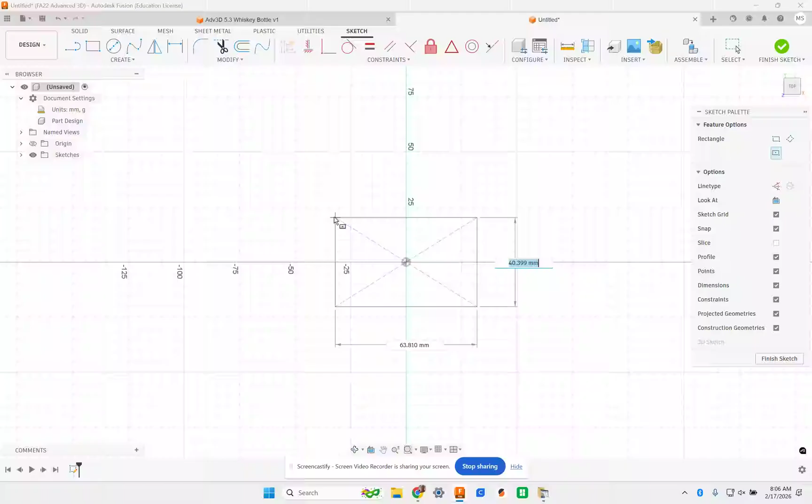To begin with, we're going to start with a sketch of a rectangle, and we're going to use the center point rectangle. Drop it in the middle. Our dimensions here are going to run 63 deep and 76 wide. Before we click out, we're actually going to choose the fillet tool. We're going to drop a fillet in these bottom edges.

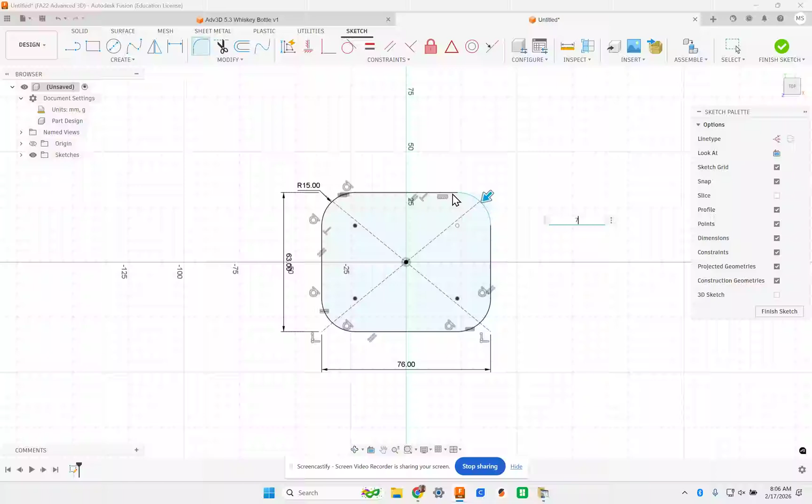I need to click both sides of each of the right angles here in order to drop a fillet on them. Once I have them all selected, I'm going to drop in a 7mm fillet. I can hit finish sketch, and that is the bottom level of our bottle.

Now, if I go back to the bottle, you can notice it's got basically 4 different levels. There's a rectangle on the bottom, a rectangle at the midpoint, a circle, and then another circle. So we're going to have to do those. And to do it, we're going to offset a plane. So I'm going to construct, notice I've clicked on my object, I'm going to construct an offset plane.

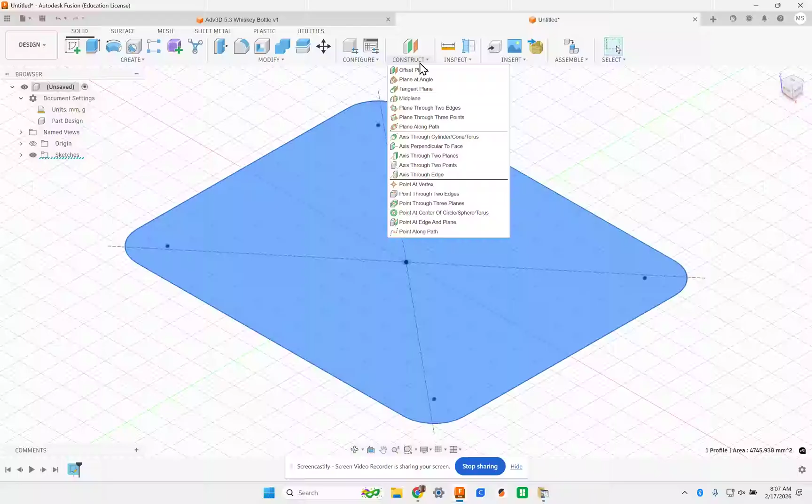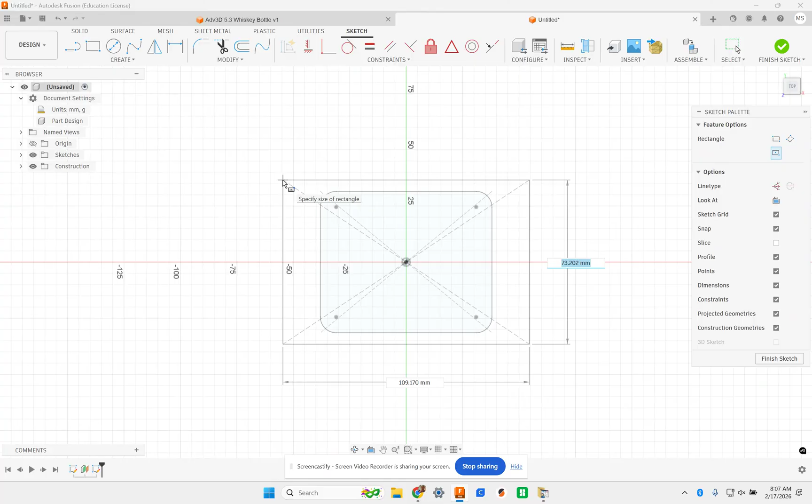This first offset is going to move up 114 millimeters. When I hit enter, I have now a plane that's 114 millimeters offset from the bottom. I'm going to click on that plane, and we're going to create another sketch here. It's going to be a rectangle with a center point. Start in the center. I'm going to drag it out. This rectangle has a depth of 76 millimeters and a width of 95.

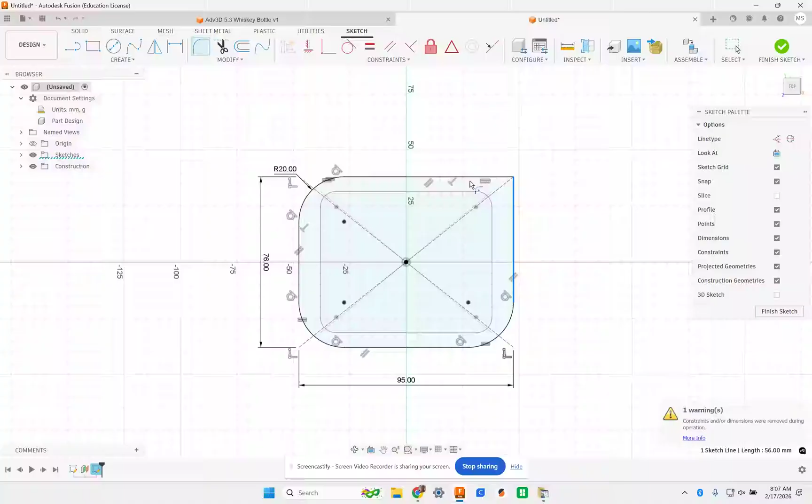Just like the previous one, I'm going to want to drop in some fillets. So I'll grab the fillet tool, grab a corner, or I should say grab a side, grab a side, grab a side, and grab a side. Now this fillet's going to run at 12 millimeters. So I just put a 12mm fillet in there. You can see that note right here, 12. I'm going to finish that sketch, and I've got 2 of the 4 parts I need.

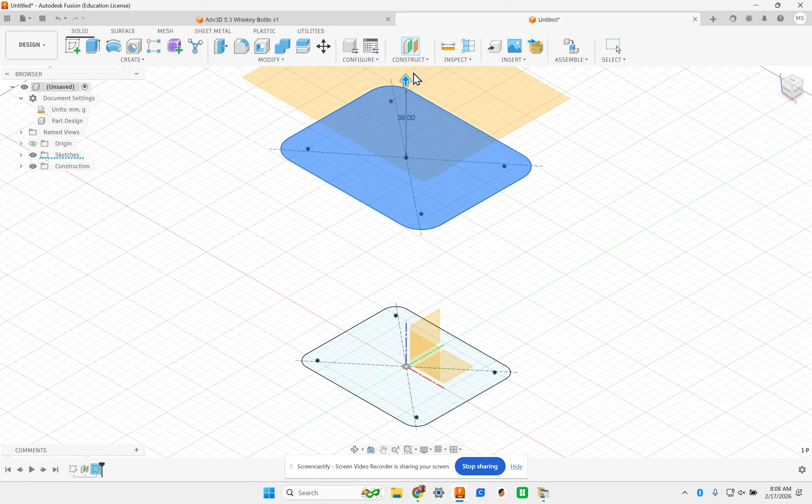Next, I'm going to click on the object I just created, that kind of middle rectangle. And I have to construct another offset plane that's going to be above this, and we're going to run this one up 38 millimeters. I'm going to click on that plane. I'm going to create a new sketch of a center circle. This is going to be the start of the neck of the bottle.

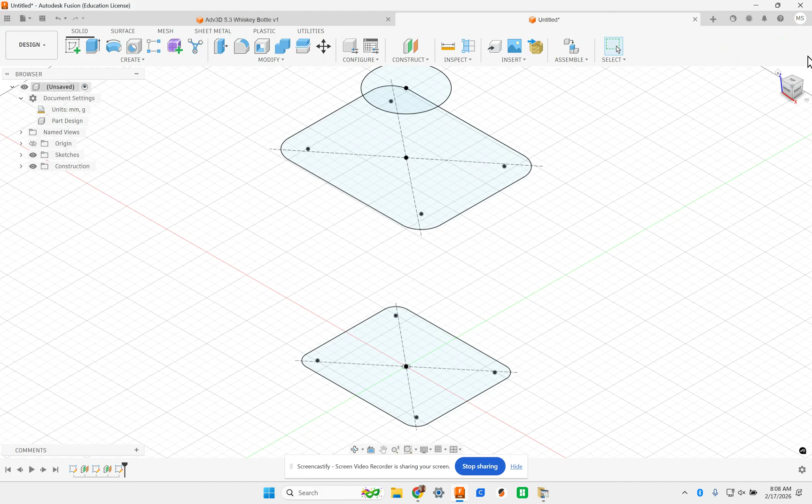We're going to run this out with a 40mm dimension and click. So there's my 40mm circle. It's looking pretty good. I can go ahead and home this now, and I need to do one more offset. So I'm clicking on the 40mm, clicking offset plane. We're going to run this up 89 millimeters. I'm going to drop into home view so I can find it.

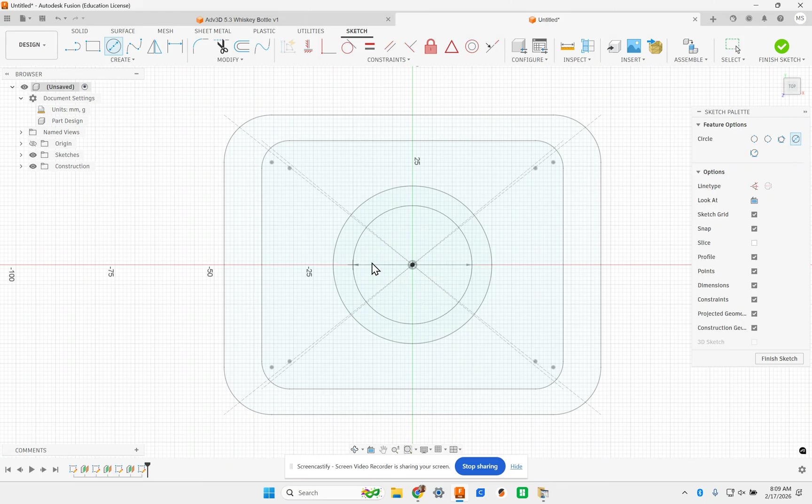And I'm going to click on that plane, choose create sketch, and we're going to drop in another center point circle. Click in the center, drag out, and this one we're going to run at 30 millimeters. I'm going to move this line. 30 is good, but I don't like where it's positioned, so I'm going to drag it, get it out of the way. You'll see why I did that in just a bit.

Finish the sketch, go ahead and click on home, and you can see we got kind of the general gist of what our bottle is going to look like. Rectangle, rectangle, circle, circle. Now, if I went right into the loft tool, because we are going to loft this, which is under create, and then loft.

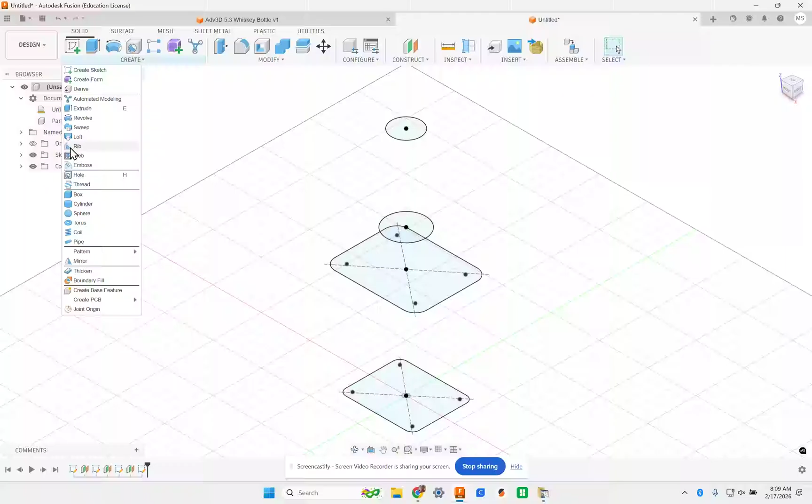If I went ahead and clicked on my objects to loft, you will see it's going to do some weird stuff. That looks more like an I Dream of Jeannie kind of bottle compared to the whiskey bottle that we're trying to make. So here's what we're trying to make, and you can see here we've got some issues. So we're going to actually delete that loft.

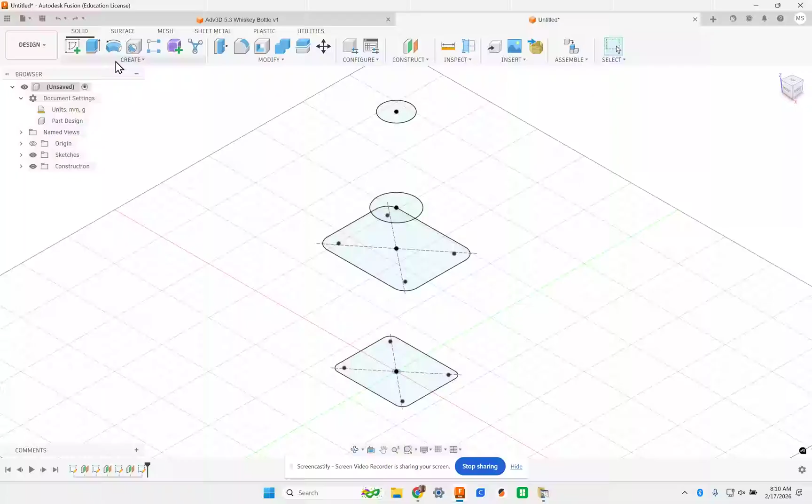I take it back. I'm going to undo that loft. And now I need to put a point on the side that we can use as kind of a guide point to follow while we're building out this shape. So to do that, I'm going to click on the bottom plane here.

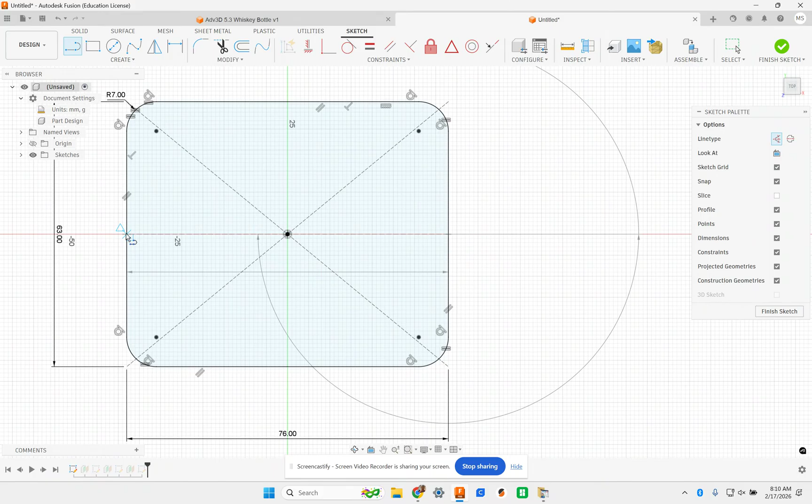Actually, I can double click on this object, and I'm going to hit letter L for line, or you can go up here and choose the line tool right there. I'm going to make this a construction because I don't want it to actually show up in the build. I'm going to click on one side where the triangle starts and bring it to the other side, drop it off, hit finish sketch. So now I've got a line going through the bottom.

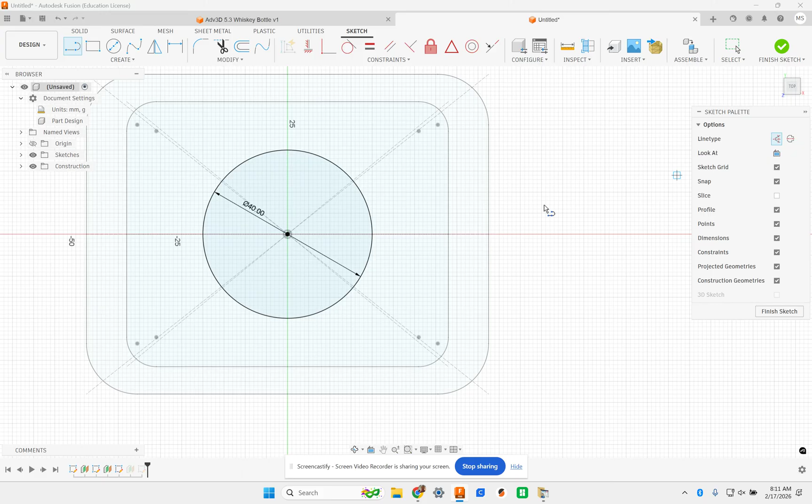Got to go to the next shape. I'm going to make another line, construction line, click at the triangle, drag it straight across, click at the triangle, we're good. Go to the third shape. It's going to be this circle, make a line, make it a construction line. I can't go edge to edge. It's not going to find the actual edge, so I can actually start in the middle, bring it out until it catches the edge, click, and now I've got a construction line going out.

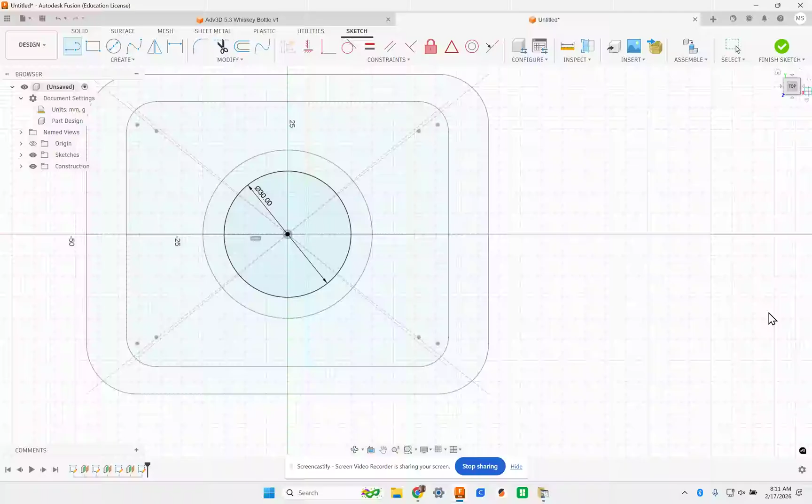And I'll do my final shape here. I'm going to go into the line tool, choose construction line, start in the middle, drag it out, click, and finish the sketch. So as I'm all done, if I zoom in here, I should see I've got a point there, got a point right there, got a point right there, and I've got a point right there.

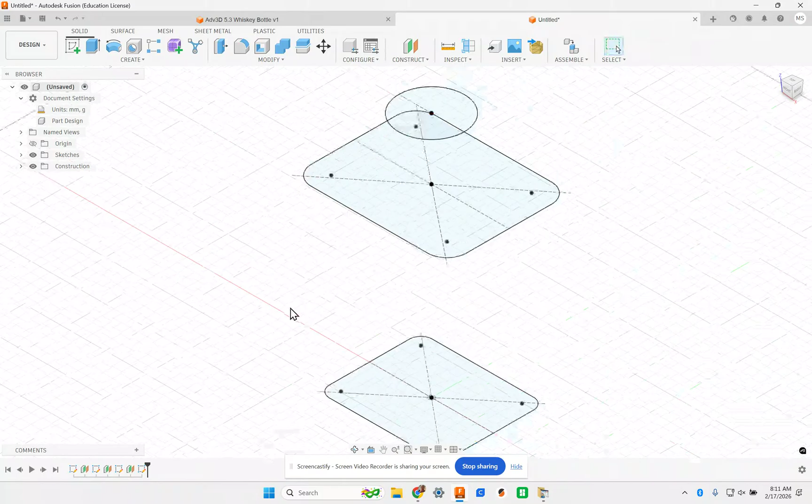Awesome. So those 4 points I'm going to join together using a spline tool, and that will help us make our bottle look more like a bottle and less like I Dream of Jeannie bottle. So that's the next step. So I'm going to click on Create. I'm going to actually choose the ZX plane, which is this front face. I'm going to go to the spline tool, Fit Point Spline.

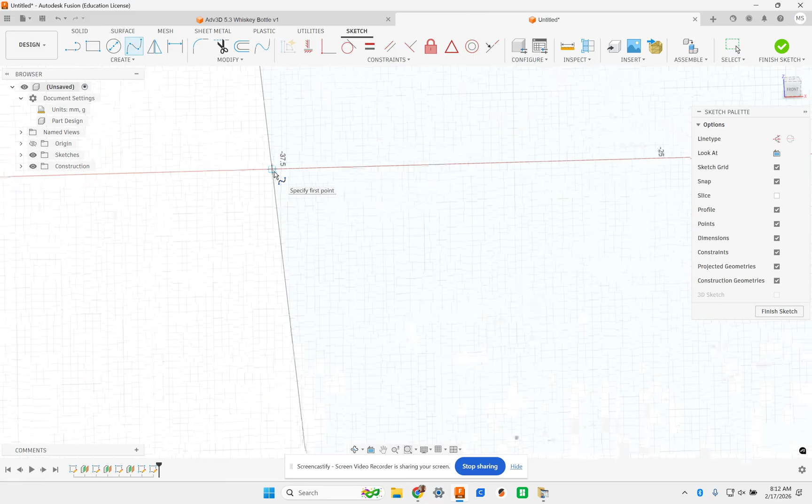I'm going to zoom in a little bit so I can find it. And I actually want to grab this point right here. It'll snap to it. It takes a little bit of playing around to get it to snap, but it will snap to that line. And I'm going to drag it up, zoom out a bit, drag it up, zoom in a bit. I can adjust my view, zoom in, click right there on that little buddy. Zoom in, we want to find this point right here, click, done.

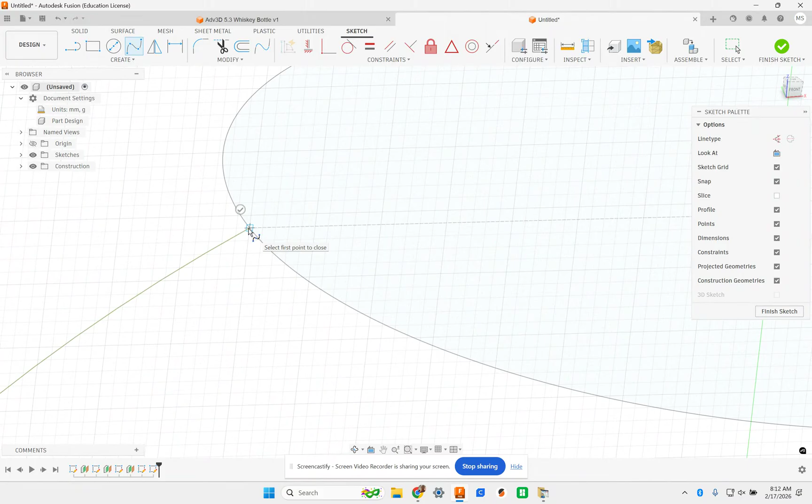Okay, so now I'm good with my spline, and I'm going to go switch over to the line tool. See how it's got the little squiggle for spline? I'm going to actually hit the L for line tool. Now I'm going to click at this final point that I left because we want the neck of the bottle to be more straight. Zoom in, click, and we are good on that. So I'm going to hit checkbox.

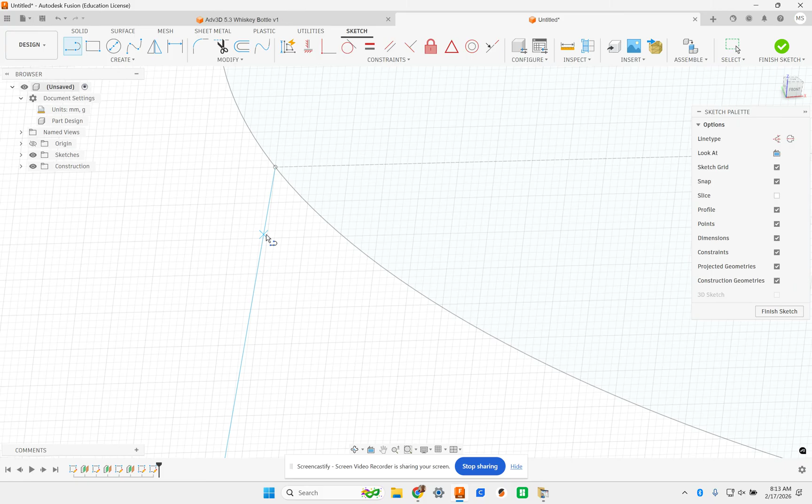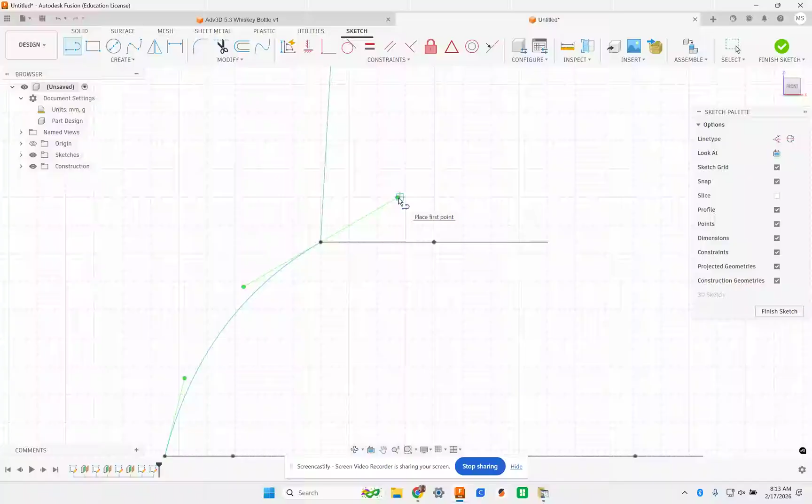So I'm still within the sketch palette, and this is key. Earlier when I was doing the demo on this, I came out of the sketch palette and I could not get back to the right spot. So I'm still within the sketch palette. I'm going to go to the front, and we want to revolve this. Actually, we want to adjust this a little bit. I'm going to hit escape because you can see I've got the line tool turned on. I'm just going to hit escape one time, so now I can do some adjustments with this.

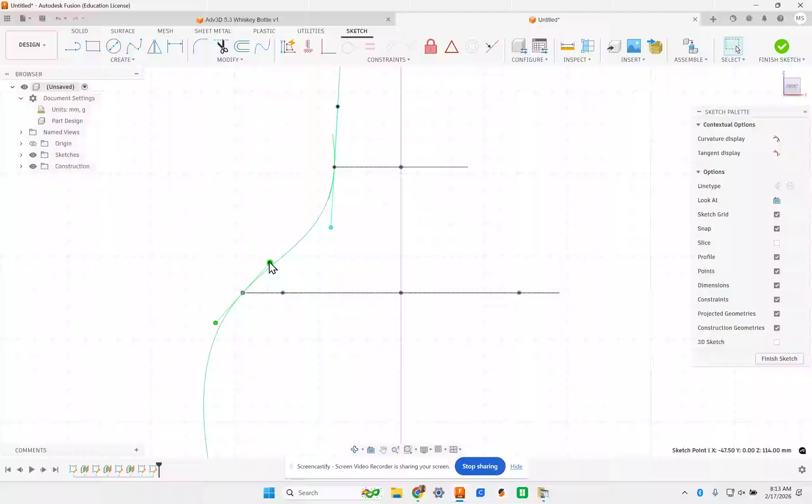And this is very important too. I have to drag this piece so that it lines up with this vertical bottle neck. Otherwise, when we go to do the loft feature, it's not going to loft correctly. I can do another adjustment down here if I need to. I can adjust this little doohickey. I'll bring it like this. Okay, I'm going to swing out here by hitting front, take a look at my bottle, see if it looks how I kind of want it to look. That looks pretty good.

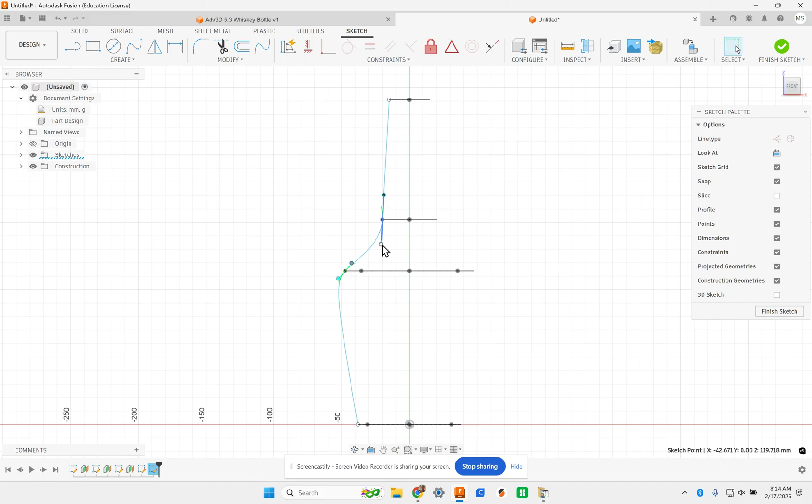All right, now I want to mirror this line, and I want to go to the opposite side. I want to redraw it. So to do that, I'm still in the sketch palette, I have not hit finish sketch yet. I'm good to go with my shapes. Again, if you want to tweak your shapes, you can. Just verify that this top dot here lines up with this vertical line. Otherwise, you're going to have problems down the way.

I can go into the create menu. I'm going to choose mirror. This is the sketch mirror. Oh, I take it back. I got one step ahead of myself. I actually need to hit the line tool first. I need to make a center line so I can mirror it.

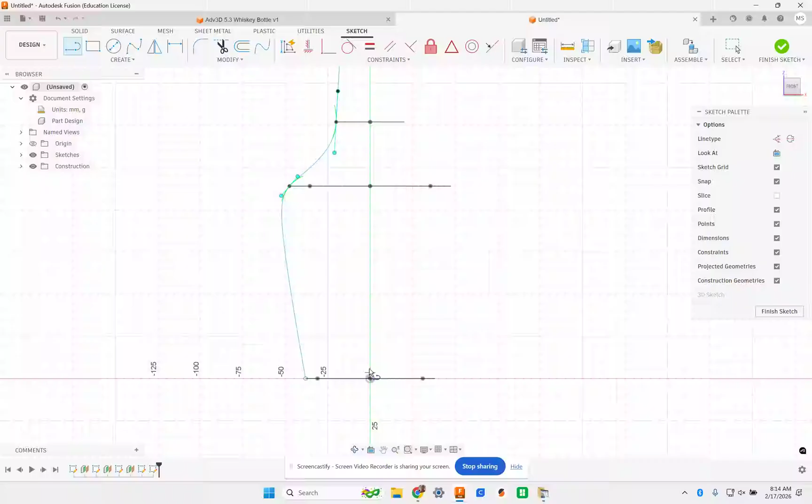So now that I've got the line tool selected, I'm going to choose construction because we're not actually making a real line. I'm going to choose the bottom, go on up, choose the top. And now that I've got the two things I need to mirror, the line I'm doing, as well as the center line, now I can go into the mirror.

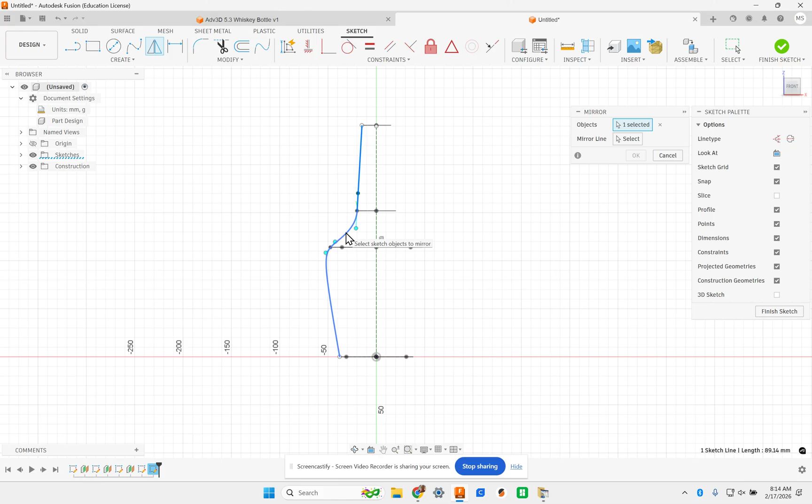I'm going to select my two lines here, hold down the shift key. So those are the two objects I'm mirroring. Then I have to choose the line to use to mirror it. That's this line right here. Got those done. I'm going to hit OK. That looks pretty good. I'm going to hit Finish Sketch. Now I've got a pretty good looking kind of outline of what the edges of my bottle should look like.

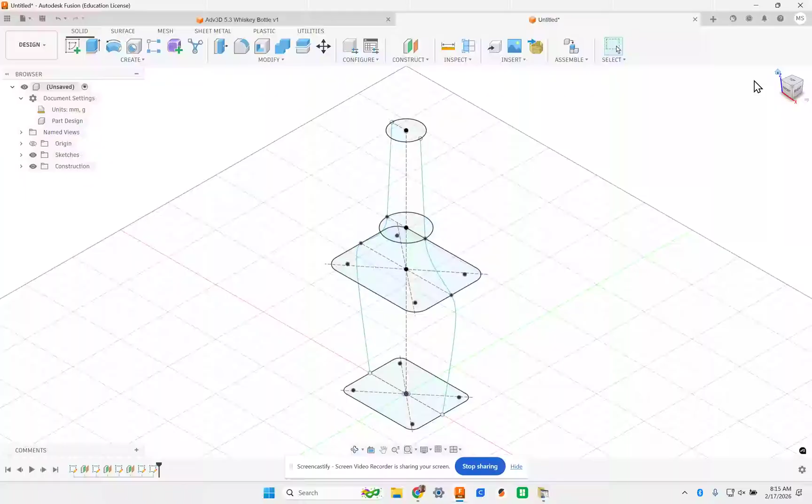Next step, I'm going to go back into that loft tool because obviously we want to connect the different planes. So I'm going to go here to Create, choose Loft. Now I'm going to pick this bottom guy, and then the middle, and then the circle, and then the circle. And you're saying to yourself, wait a minute, it went to all the weird shapes again.

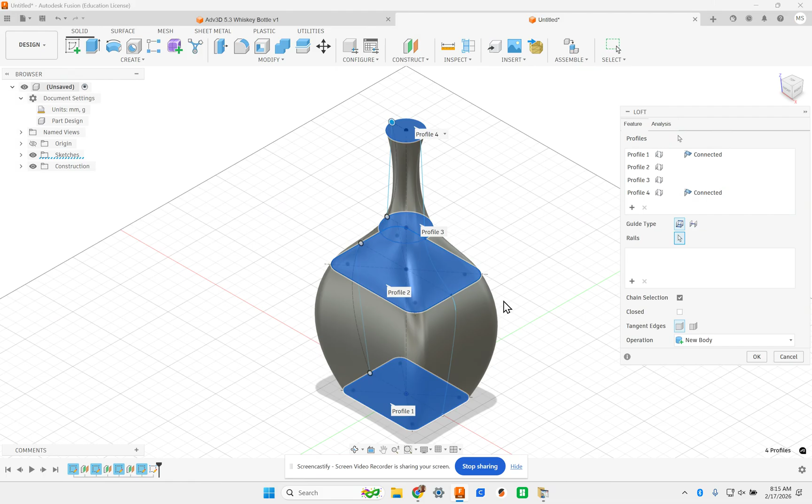Well, we can actually use rails. That's what we were building with that spline tool. We were building rails. Now we're going to choose rails, and we're going to click on this spline and also this spline. Ooh, that looks pretty good. I'm going to hit OK, and you can see that's pretty much 89, 90, 95% of the way there.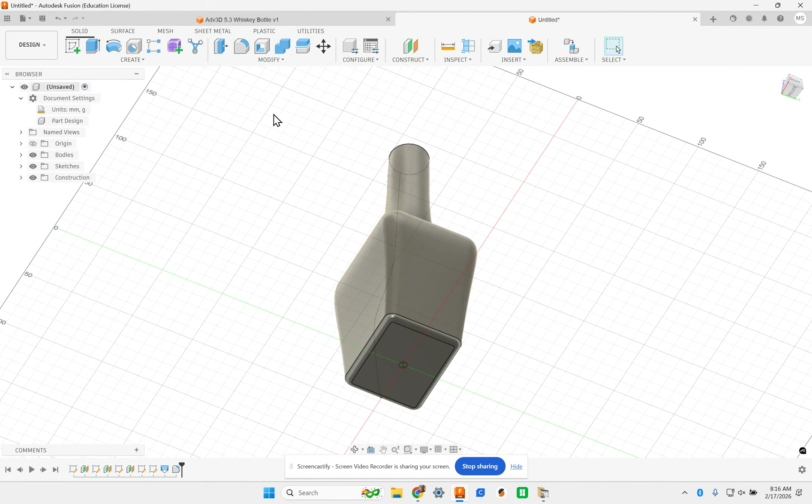We want to make our bottle look a little nicer as a bottle, so we are going to add a fillet to the bottom. So I'll click on the bottom, fillet tool. Let's go with about a 5mm fillet on that, 5 mils. At the top here, I'm going to add some threading so we can conceivably put a screw top on top. So I'm going to click on this top edge.

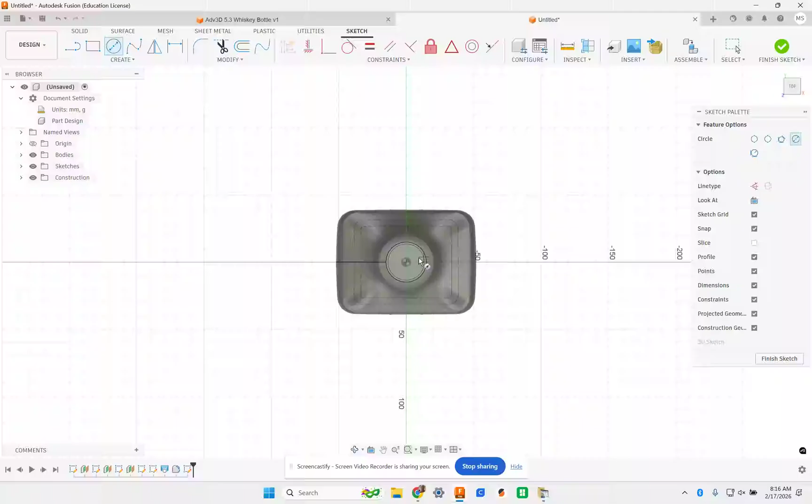We are going to go into our create menu, and we're making a new sketch of a circle. We're going to click here and drag this out. Let's go 27 and finish the sketch. Now we're going to choose that circle we just made. We're going to extrude it up. Let's go 12mm. And we've got kind of the beginning of a place that we can put a screw cap on.

The next feature, this is where we're going to make it hollow. I've had students in the past just print this as is. It's not hollow, and it will take forever to print. So we're going to click on this upper surface here, the thing we just added. And we're going to go here and choose the shell feature. So shell feature will make everything inside hollowed out. We're going to run this down to a 3mm shell.

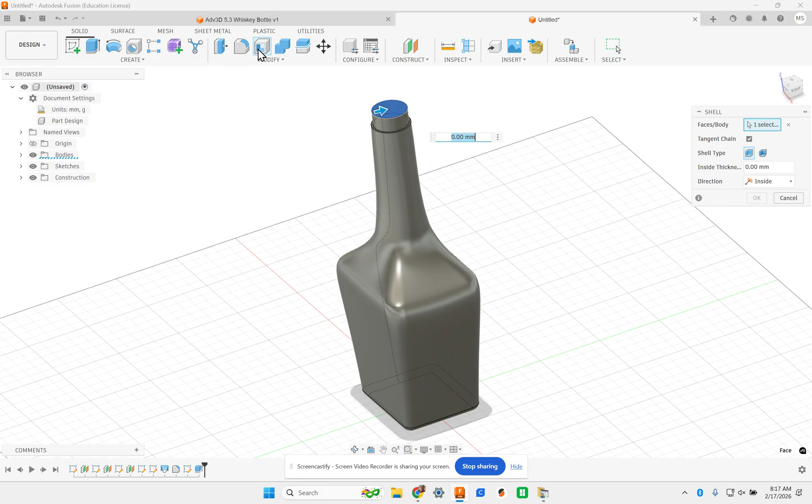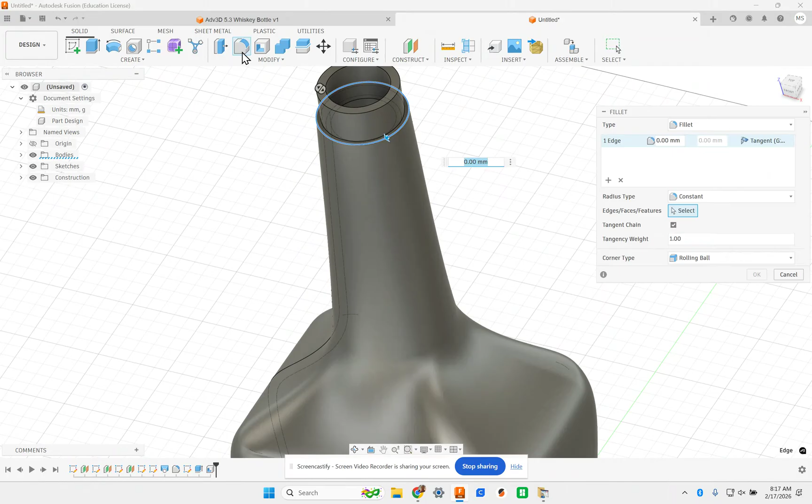I hit 3. It's going to then basically hollow the entire thing out with 3mm of thickness around the whole thing. And that's exactly what we want. So now we have a hollowed out bottle. We can zoom in and make this edge here a little smoother so we're not cutting our lip on it. We're going to hit fillet, 2 mils just to smooth that out.

And last but not least, we're going to add some threading to our bottle. So we'll click on this surface here. And under create, we can go down to thread. And now some people, when they do threading, they forget to check this modeled box. So you can see the word modeled here. We've got to check modeled, or else it's not going to actually make the thread. It'll just be a representation of the thread. We actually want to make the thread.

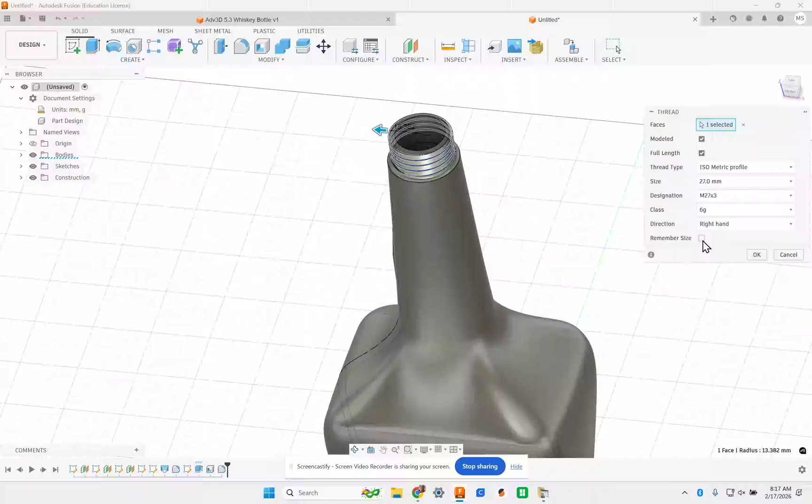So we're going to click on modeled. We're going to leave the rest of these settings as they are. This is like if you get into real deal creation, you can jump in here and there's all sorts of different thread profiles you can try. We're just going to leave it as is, hit OK. And you can see we now have designed our whiskey bottle.

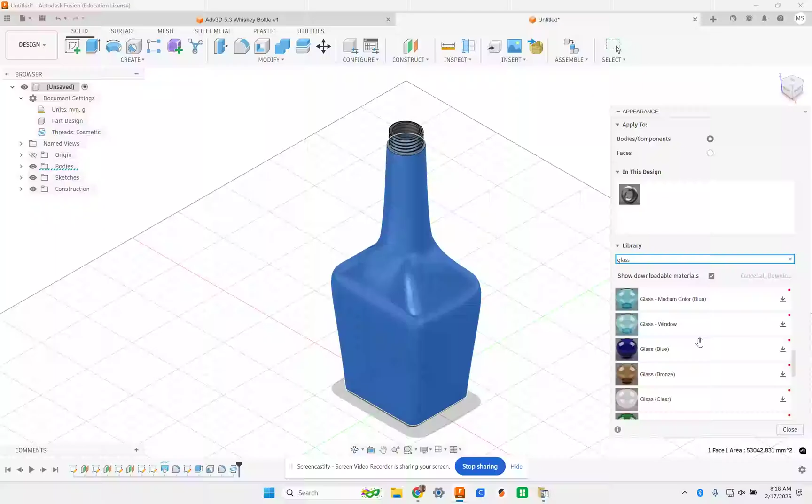Looks pretty good. If you want to be real fancy, you can right click on it, choose appearance, go in here to glass. And then if you scroll down a little ways, you'll find some kind of glass. It says something like bronze glass. If you drag and drop it on there, it'll make it look more like a bottle, if you so choose.

If you want to really accentuate it, you can go into the display settings, environment, and make it dark sky. Now you'll see, ooh, snazzy. But that is, for all intents and purposes, how to make the whiskey bottle for this lesson.